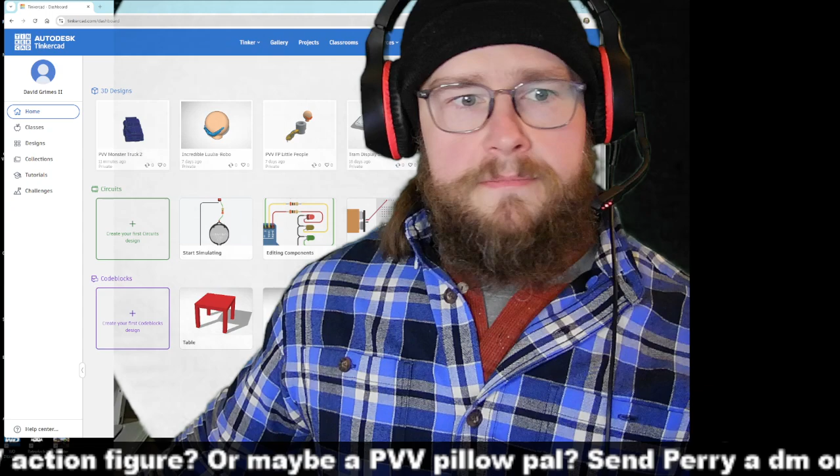I have some 3D work to do, and I thought I would hop on here and do it live because I'm gonna want footage of it for later on when I'm making a YouTube video about how I did this. A number of the fans that I've come across, and a number of people who tune into these live streams often, have gifted me a lot of cool toys, and specifically, I've gotten a bunch of these guys.

These are Monster Jam minis. They're pretty small. I think I have a regular size. Yeah, here we go. When compared with a regular size Monster Jam vehicle, covered with cat hair, considerably smaller. Interestingly, they are basically the same size as the old.

Hey, robotic! They are basically the same size as the old Micro Machines from back in the 90s. The Micro Machines Tuff Trax. This is a Buffalo Tremor 2. I actually used this truck the other day on BeamNG playing the retro trucks.

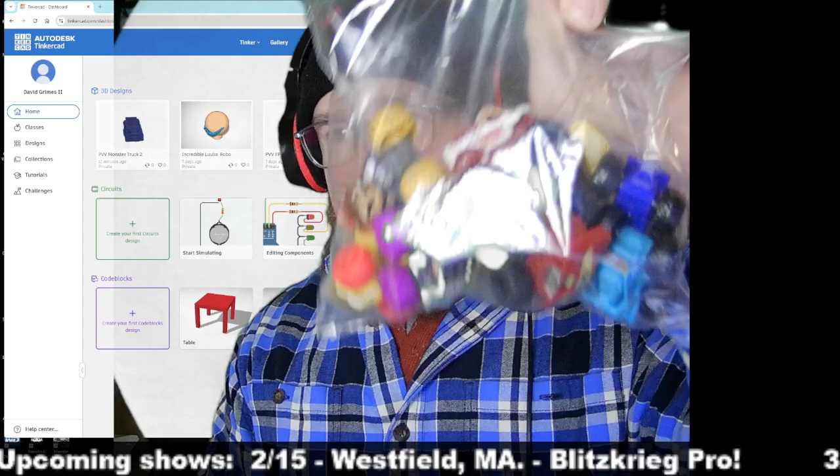But I've been meaning to get on here and design a little display for the pile of these that I've accrued from various fans. And I was sort of doodling up a little sketch of what I'm planning and came up with some cool ideas on how I could make this pretty unique. So I'm in TinkerCAD here, and I'm gonna create a new 3D design, and we are gonna get rolling on this.

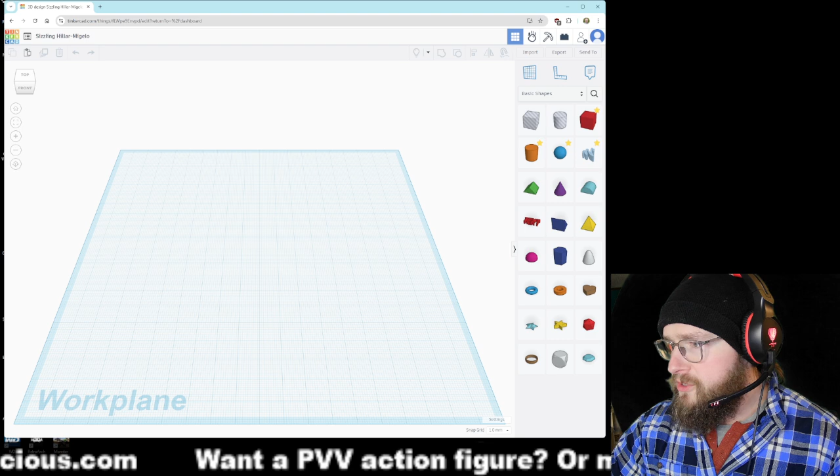This was all sort of a very sudden idea to go live and do this. So I've got a lot of things that are not in the right place. So you're going to see me occasionally shuffling stuff at random here. I've got to stretch my keyboard over where I can reach it. I got to bring my mouse where I can reach it. All things I should have thought about before I got started here, but again, very spur of the moment. All right, I think we're good to go. I do have an abundance of toys all over my desk right now as I've been doing a lot of design work, and I need certain pieces for reference and certain pieces to show on camera.

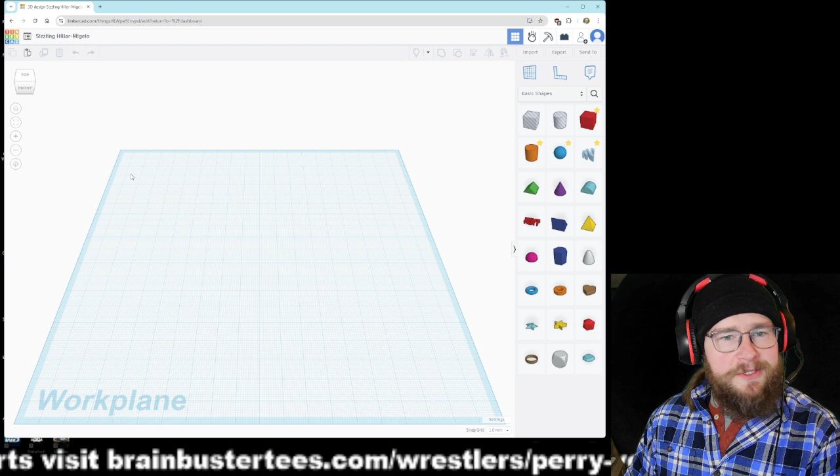So in designing the shelf for these, I have a pretty simple idea, and it's essentially a box with dividers that are going to slide in. And usually I would just do this all as one piece. Sure thing here, Robotic. Usually I would do all these as one piece, but I have some cool ideas on how to kind of customize this for these toys and make it a little bit cooler. So I'm going to start off simple enough.

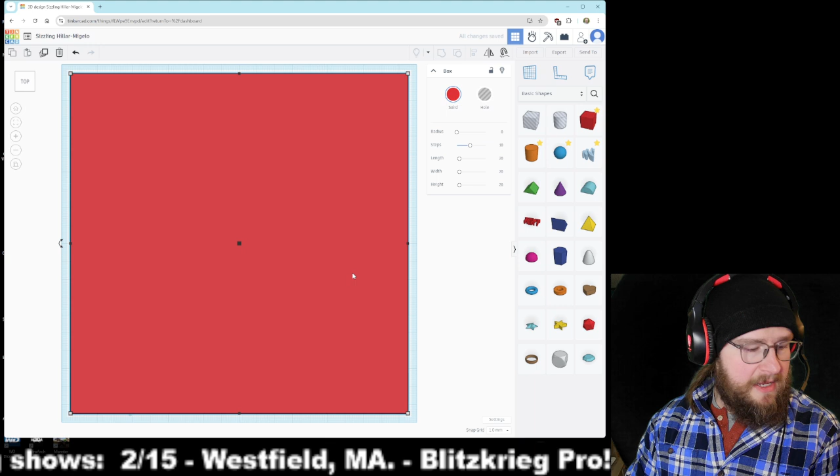I'm going to go ahead and bring a cube into the field here. I'm going to switch to the boring view. Come up on the top, and I have a bunch of numbers here that I wrote out earlier. So I have some limitations that I'm working with. The first, and it's an important one, is the size of my build area on my 3D printer. I can't go any bigger than it because I want this all to print as one piece. You can see there it fills roughly the entire panel, and it's 190 millimeters by 190 millimeters.

And that's sort of the frame of what we're looking at. So I know that I need this entire thing to be 51 millimeters deep going back to the wall. So I'm going to go ahead and, okay. So now I need to make a cube that's going to go inside that and hollow this whole thing out. So I'm going to bring another cube out here. And I know that I want the sidewalls on this to be 5 millimeters. That's a nice thick size that the printer can print reliably. It's a little bit chunky, but good for what we're doing here.

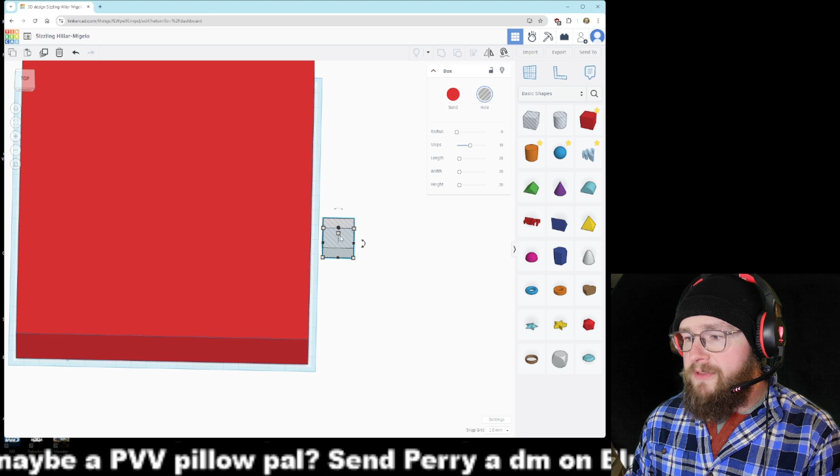So we're subtracting 5 off each side and 5 off the top. So that's 10 off one side, 10 off the other. Makes it 180 by 180. So I'm going to go ahead and make it 180 by 180.

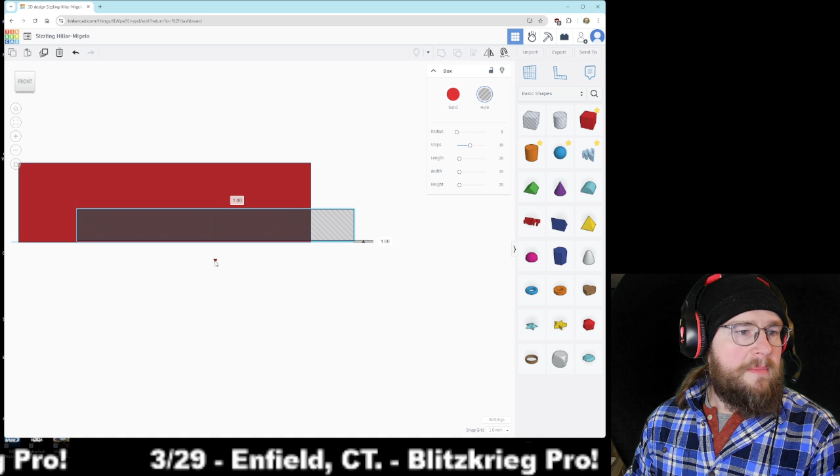And I want that back wall to also be 5 millimeters. So go ahead and raise this up till it tells me I've gone up 5 millimeters.

Go to our top view here. We're just going to center this as best we can. I think the best way to do it is to line it up on one corner. And right now it's moving at 1 millimeter increments. I'm going to go 1, 2, 3, 4, 5. And that is now centered.

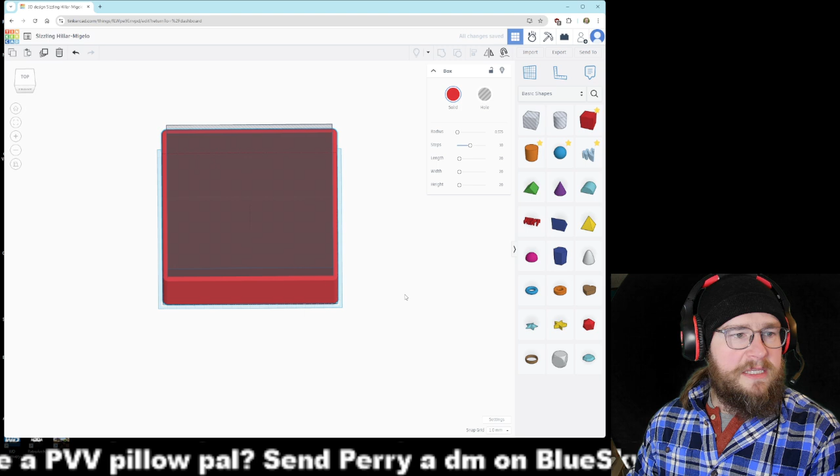And I need it to be tall enough to come all the way up out the top so that it is now hollow. We're going to round the edges on this just a little bit. I don't like the sharp corners right on the edges. So just ever so slight - see, that's way too much. That's about what I want. Something just really minor like that, because I want everything to still be thick and flat.

And that's looking pretty good. All right, so I'm going to go ahead and group that. So now we have sort of the basic box of what's going to become our shelf here.

And this is where things are going to start to get a little bit interesting, because I need to put in some slots and some other various shapes so that shelves can go in here. It's going to get particularly fun when we get to designing the actual shelves.

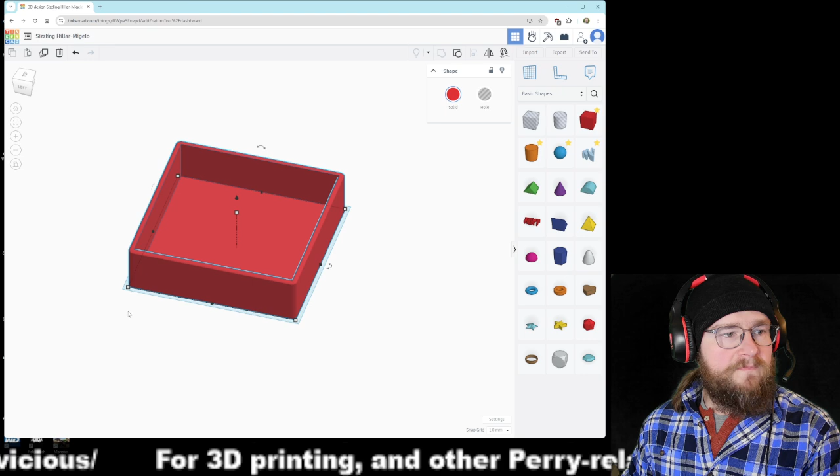So the first thing I want to do, I want a little slot along one side. We're going to call this the top and this the bottom. And I need a little slot running back here because I want to be able to slide in a background.

I want to be able to print a little background so it's not just a plain black shelf. I'm going to print this in black filament. I don't want it to just be a plain black background. I want to be able to print something cool like fake crowds or fake arena or something for each shelf.

So to do that, remember this was 180 from top to bottom. So I'm going to go ahead and bring in another cube. And we're once again going to go 180 - I needed it to be the other way, but that's fine. I'm going to pop this over 90 degrees.

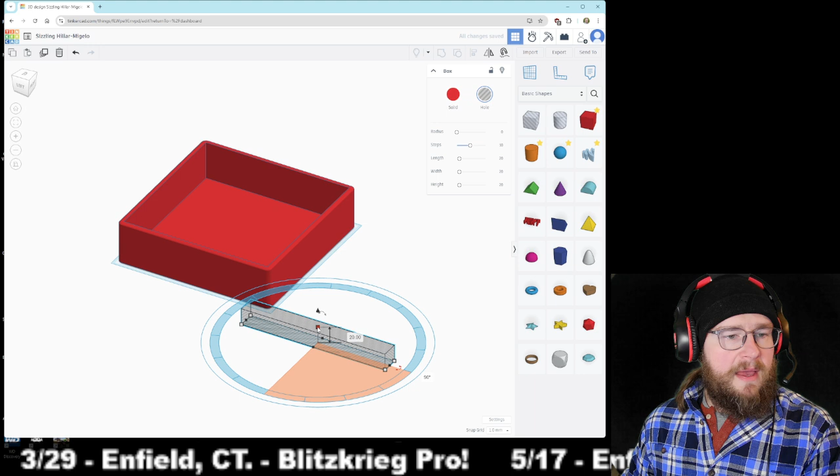And then as far as the height, this height doesn't have to be that tall because I'm planning to print the little backdrop I'm going to slide in on like cardboard or something, so it's not going to be too thick. Because I'm going to use like a cardstock, I think maybe 3 millimeters is plenty. So we're going to call this 3.

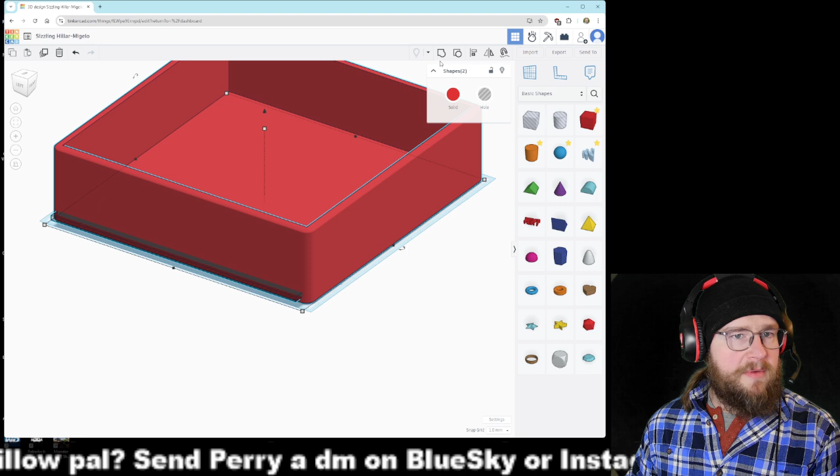Now we're going to go to that top view again. Bring this over, I'm going to line it up with those. That's looking pretty good. But I still want to leave that back plane, so we're going to bring this up 5 millimeters. Okay, that's what I want. I'm going to go ahead and group that. And that's our little slot that's going to let us put in what we need to put in there.

Actually, you know what? I'm going to cheat the system a little bit. I'm going to come back here, go to the top, select just that piece. We're going to bring it all the way over to our edge there. And the reason for that's going to become more clear as we go on.

Actually, I think I need it to be even more dead on than that. That's where I need it, right there. And the reason for that is going to become clear later on.

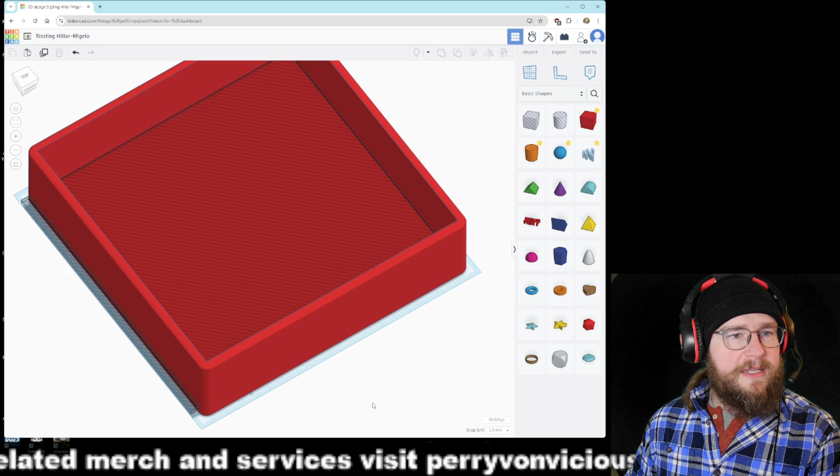Hey, Graves made it. It's a sparse audience tonight because I did this very spur of the moment.

All right, and then is that lined up evenly? Yeah, that's looking good. Okay, cool. All right, so that's where we want those pieces just for now.

So looking at my drawing now, what I need to do, I need to add in some slots that are going to - I feel like this stream was made for me. It may very well be. This may be exactly your kind of jam.

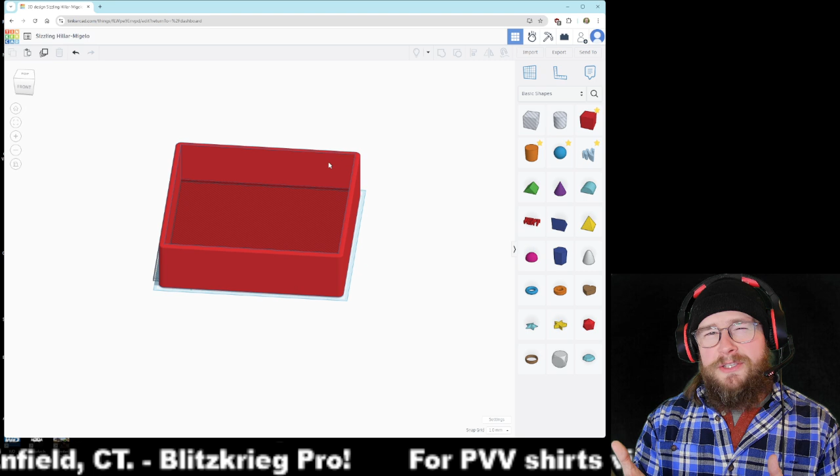So now I actually need a slot along the front edge here and through the top because I'm going to be taking essentially what's plastic packaging - in my case it came for the saw blade for my table saw - but it's a nice stiff perfectly clear plastic that otherwise I would throw in the trash, but I can cut it to make a little window to go on the front of this. So that's how I'm doing my display.

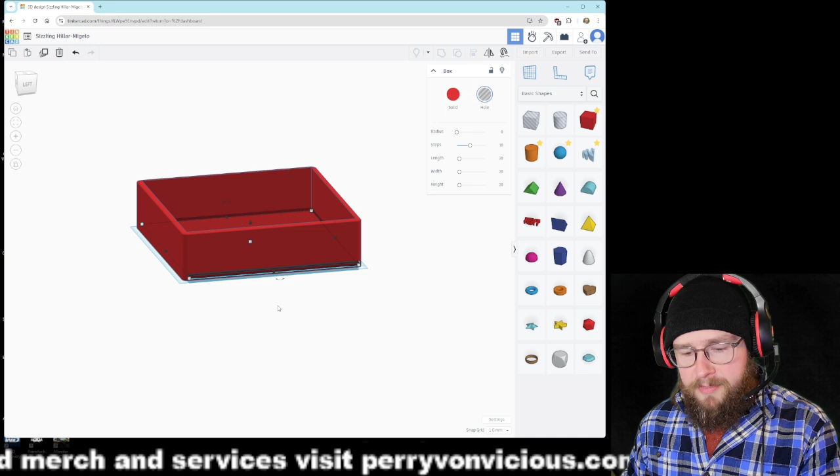And what I'm going to do is I'm going to go ahead and copy this piece because it's already kind of perfect. Hit Control D.

And now I'm going to go ahead and raise it on up just so that I can see what we're working with. I may even make it less thick because right now, I guess 3 millimeters is probably pretty good.

Zoom way in here. We're going to get to about there. And I want it to go back 1, 2, let's call it 3 millimeters down, I think is probably good. All right, and we are going to center it here.

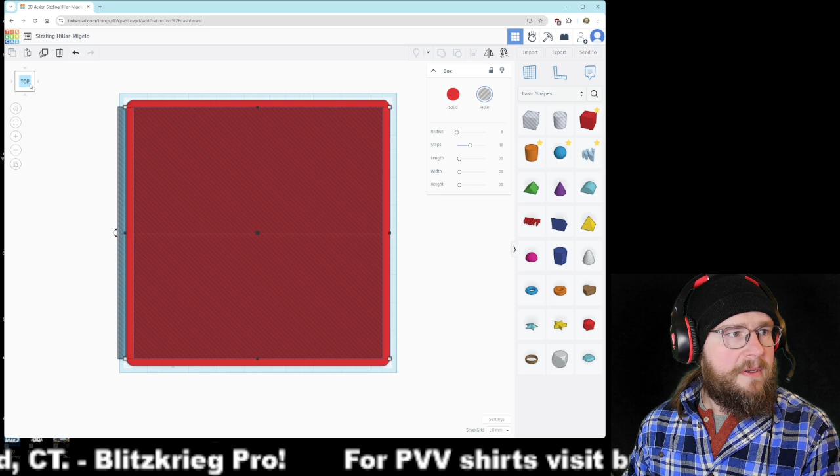Get that top view going. That's what we wanted. All right, and it's going to have to be shorter. So I'm going to change my settings to moving by 0.5 millimeters because I don't need it to go that deep into the side wall here.

So we're going to say about there, and then somewhere like right there. Because right now what I'm making is I'm making a channel that a piece can slide into.

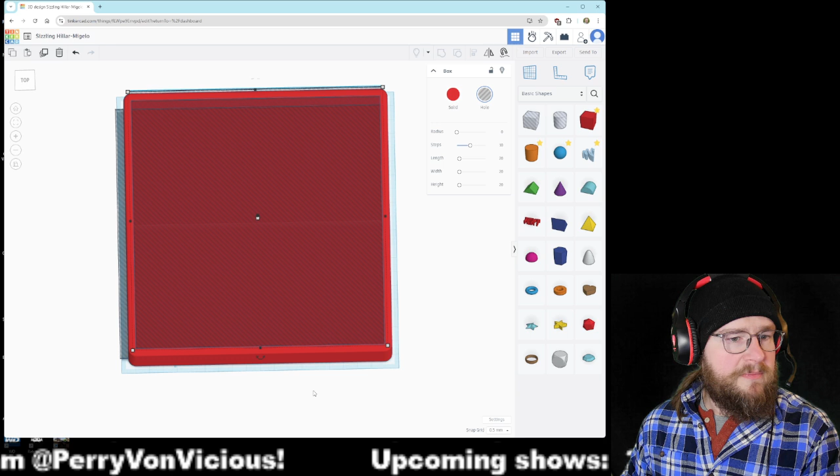Well, let's get a look. How's that? Yeah, we want it to go all the way down. So we're even going to extend the bottom just a little bit here. We just want it to come just into there. Let's get the above view. Yeah, that's looking pretty good.

And I'm going to group that piece. I think that's fine. You know what? Yeah, we'll just group the top piece. So just like that, we've got this channel that I can slide a little window into, and it'll fit inside there all the way around.

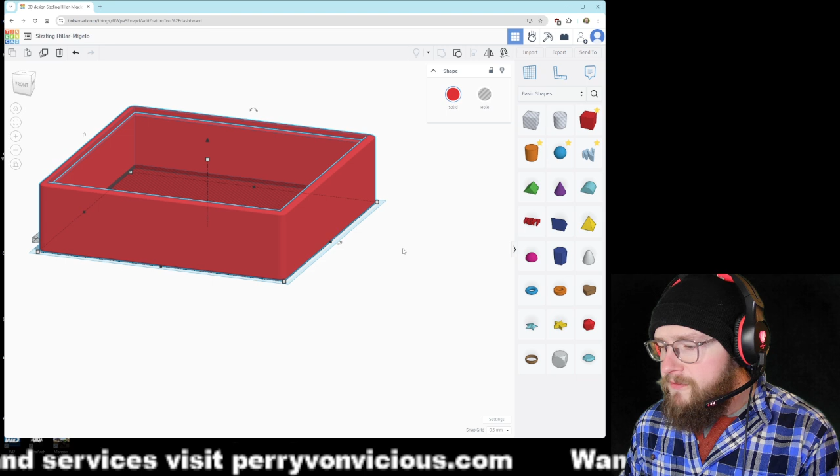All right, there we go, getting vertigo looking at my own design. All right, so now I have this design for these little channels that the shelves are going to sit in, because the shelves are going to be their own pieces.

So for those, what I need is I have a few different shapes I can choose from here. They're all tough calls, I think. Let me make sure I get all my numbers correct here.

All right, yeah, we're going to go with a simple wedge. We're going to turn it 90 degrees. Actually, you know what? We're going to leave it upright. We're going to make a duplicate of it.

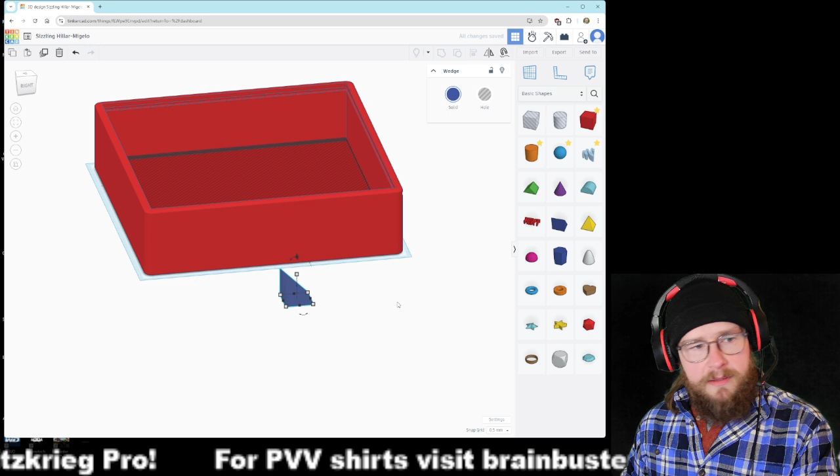Flip it horizontally. I'm going to change my settings to move them by 1 millimeter increments. Oh, that's 0.1, okay, that's what's happening there. So try that again. Command D, we're going to flip it horizontal. Change this to 1 millimeter increments.

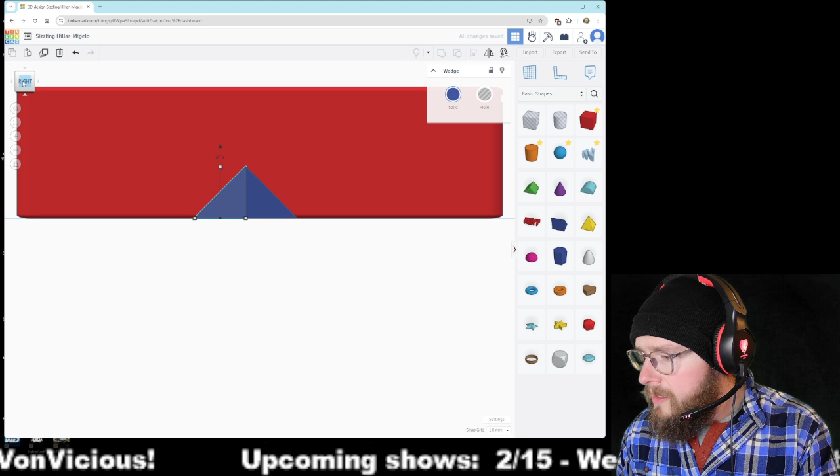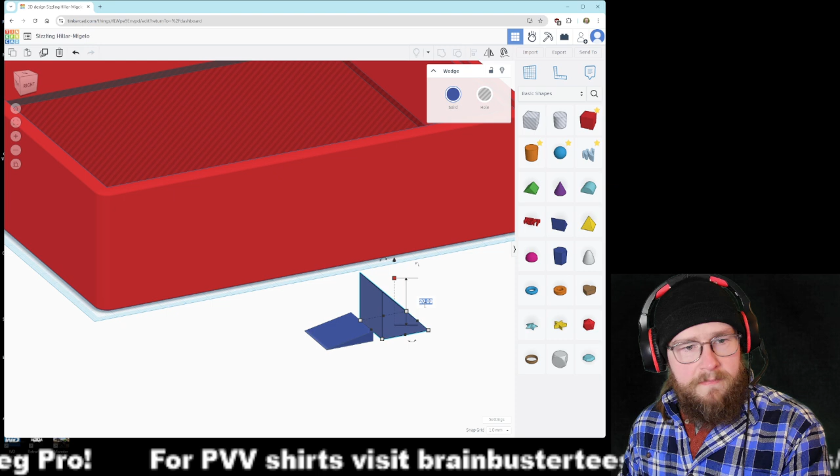And I'll wait till they're even with each other. Call that about even. And then I want these to have a 4 millimeter gap between them. Okay, that's good. And then I want these also to be 4 millimeters tall. Okay, so that's good like that.

And now this part is more or less by feel. Um, what did that end up being? 7.5? Let's call it 7. In fact, you know what? I'm going to make these 5 tall for a very specific nerdy reason that will become clear very soon.

I go with, what did I go with here? Was it 7? Yeah, 7. Good. All right.

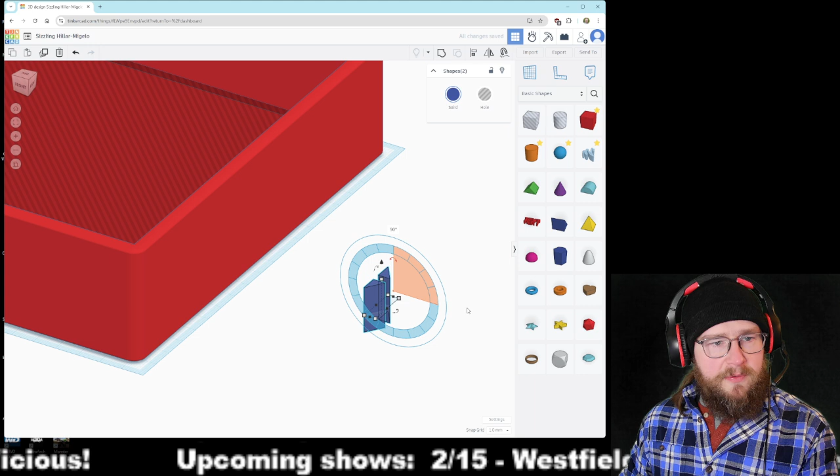So now these I'm going to flip 90 degrees, and they're going to need to go inside our design here, because they're going to be what holds the shelf in place.

So let's get a top view, scoot it over. These are moving by 1 millimeter increments. I just want them to sink down into that wall. Let's see if we can zoom in and see what's happening there. See it right there? We've just sunk into the wall. That's exactly what I want.

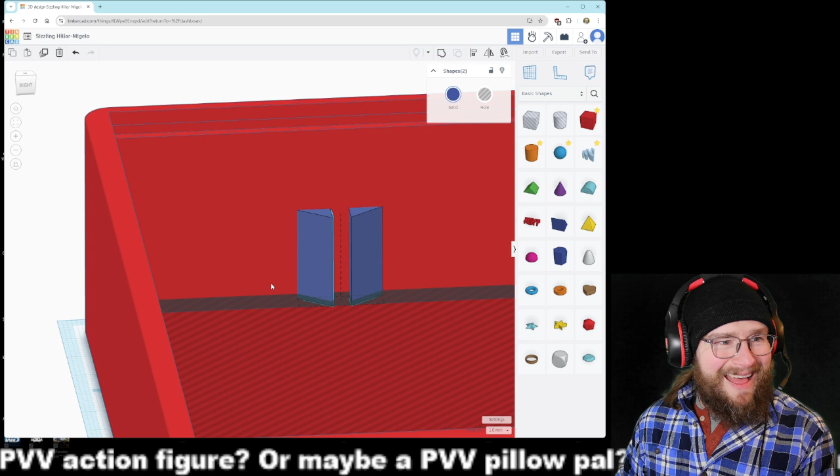All right, and now we have to make sure that this is at the right height, because each shelf needs a specific amount of space. And I have that number here, and it looks like that number is going to be 54 millimeters. So what I'm going to do is I'm going to bring this all the way back till it's at 0. And that should be 54 millimeters.

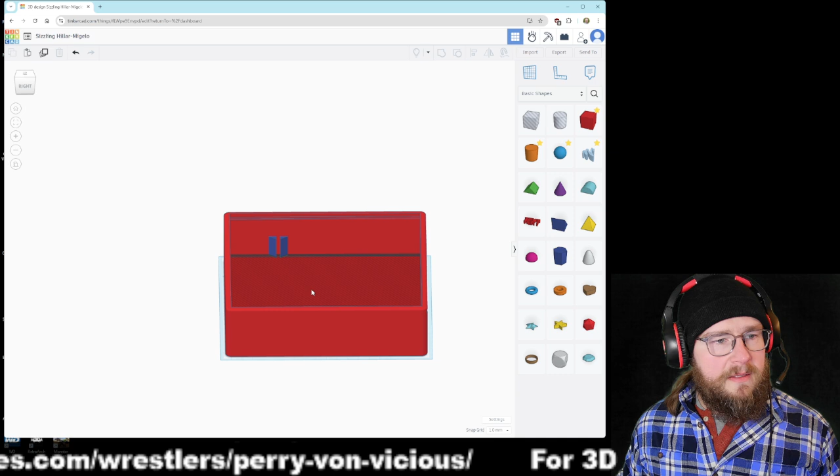Let's get a look. So there's going to be one here, one here. I'm not totally sure that that's even, and it should be. Let's go ahead and, you know what, we're going to end up just eyeballing them because it's not going to matter. They're going to be very close. But just for now, just for the heck of it, let's say that I got it right.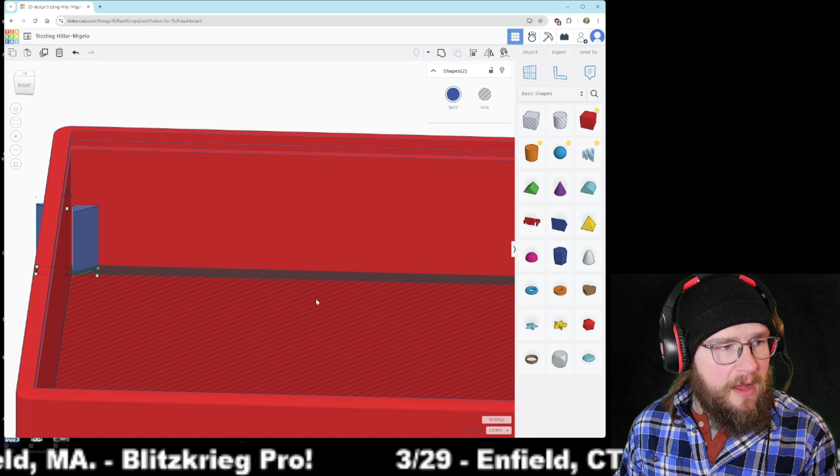Okay, not liking how that's lining up. So we're going to do it over. It is, of course, altogether possible that my numbers are off on my drawing because I was an English major and not a math major.

All right, so by my count, I need 54 millimeters up. Yeah, let's find out. That looks more correct. All right.

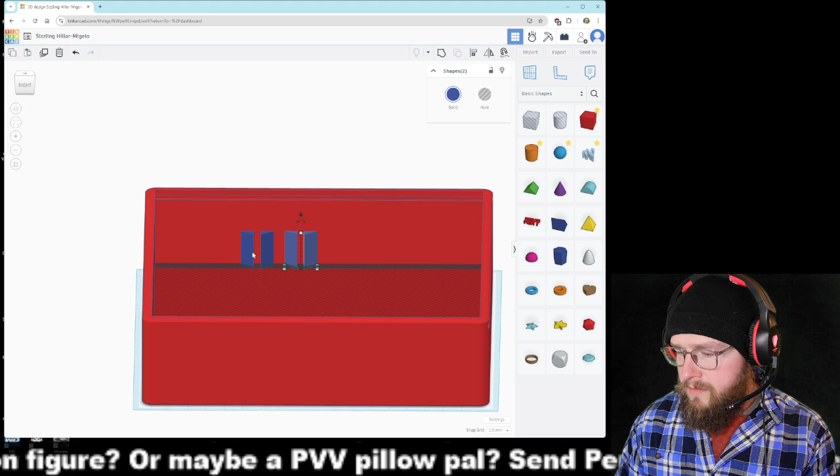So, Control D. We're going to start from there. That looks like we're about even. Okay, that's what we wanted. Perfect. Good. Great.

Now I'm going to go ahead and select all of those. We want these to run all the way up to just under this little channel that we've created. So I'm going to zoom way in and make sure that we don't go over. That looks really good. All right, perfect. That's what we needed there. Okay, looking good.

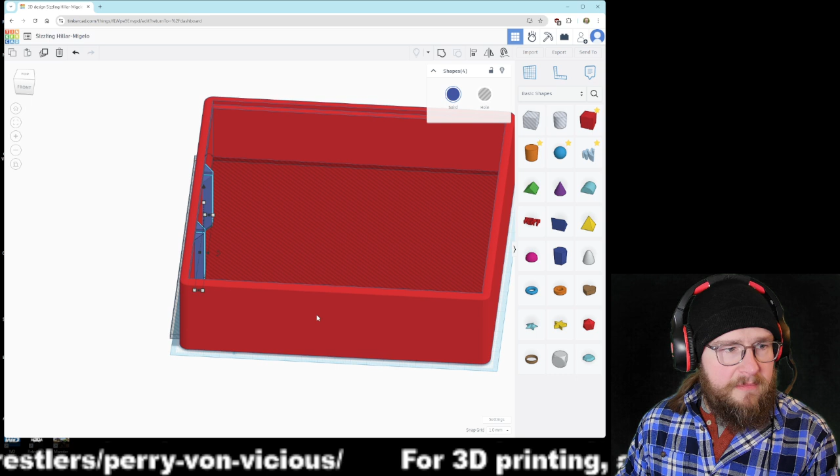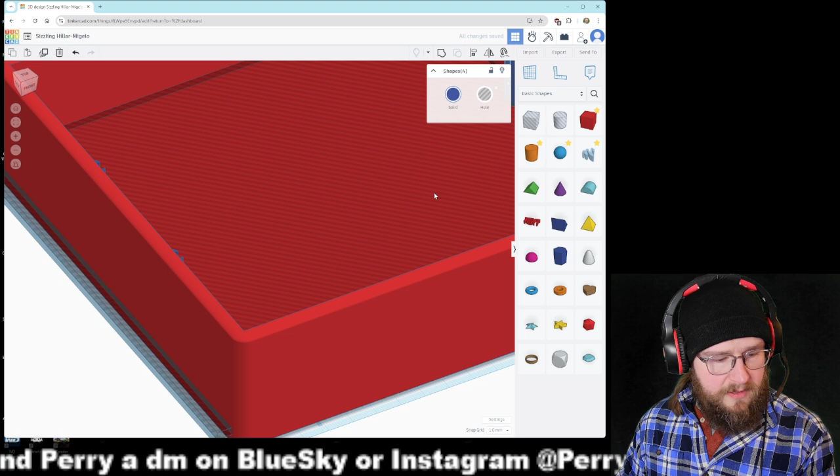So now take all 4 of those, Control D that, we're going to flip horizontal. We're going to bring it directly across right up until it just disappears into that wall. Just right there. All right, and now we have our shelf pieces in there. That's looking good.

All right, and now we can group with this little under part here, and you'll see why I left it there. So select everything, group, and now...

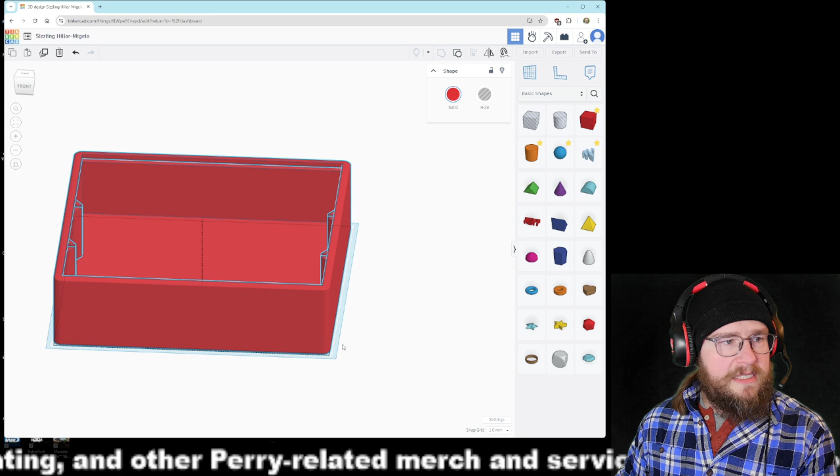These stop just shy of where that little background piece is going to go in. We've got a channel down here where I can slide in a backdrop. We've got the channel at the top where I can slide in our little window pane. So that is the background for this shelf.

Now I need to make the two little shelves that go in there, but I'm also not done with this piece because there's one more little bit of customization I want to do with it that could end up being a little tricky, but I'm happy to make it tricky. I'm happy to make things complicated.

So for right now, hit top, take this. I'm just going to slide that out of our way because now we're going to work on these shelves. So we're going to drop in our cube, trusty cube, and I have some dimensions here.

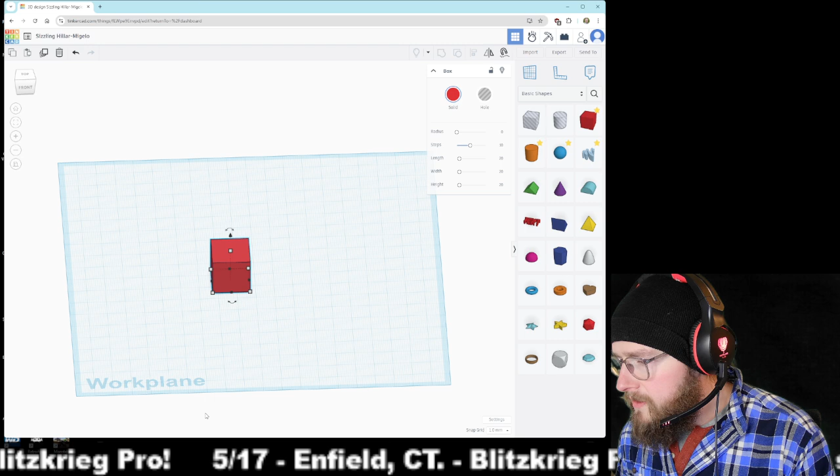It's going to be 3 millimeters thick by 178 millimeters wide by 41 millimeters deep.

Okay, now before I go on with anything else with that, I want to make sure that that's actually going to fit, and I can do it right here on the model. So I'm going to go ahead and turn that 90 degrees, bring it up. We're going to move it on over, and now we're going to zoom way in and make sure that it's going to fit.

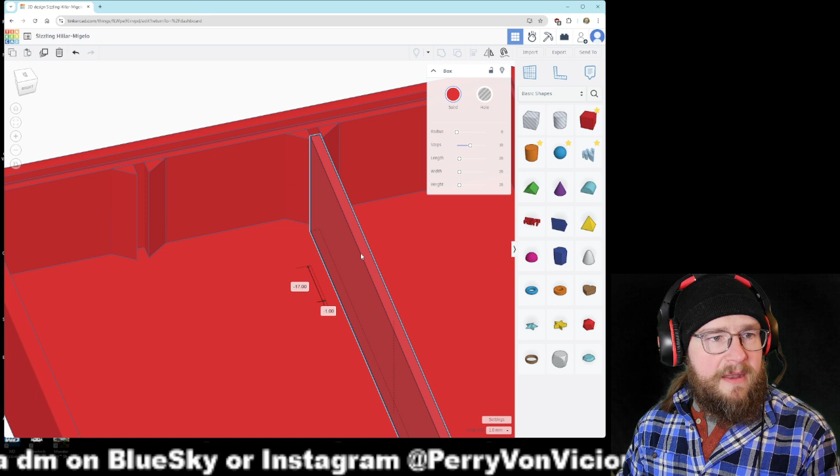Because there's a few different little tricky parts here I don't want to get wrong. Okay, so that's still not through that plastic. And it should be shy on the front here, but let's see. Oh, interesting. Okay, that's where it dips in.

So it'll be up here because of the cardboard. We might need to make it actually a little bit thinner now that all is here to be seen. Let's get a closer look.

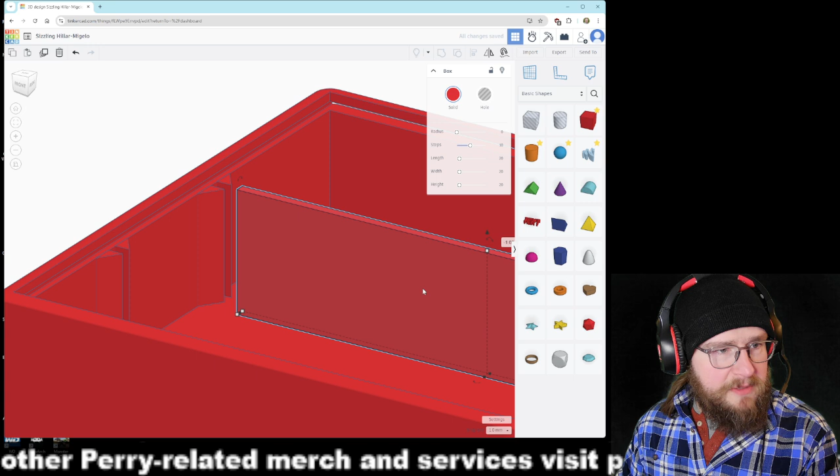Okay, so that's basically touching the back. Yeah, we're actually going to make this a little bit shorter, which is fine. I'd rather it be a little too short than a little too long, because this is probably going to sit about there.

And now if we bring it all the way over and put it into the joint where it's supposed to go, we should see, go to a top view here, that it should have a little bit of leeway on both sides. If it doesn't, I can adjust for that. It should just squeeze in. It's going to be a tight fit, and that's okay with me.

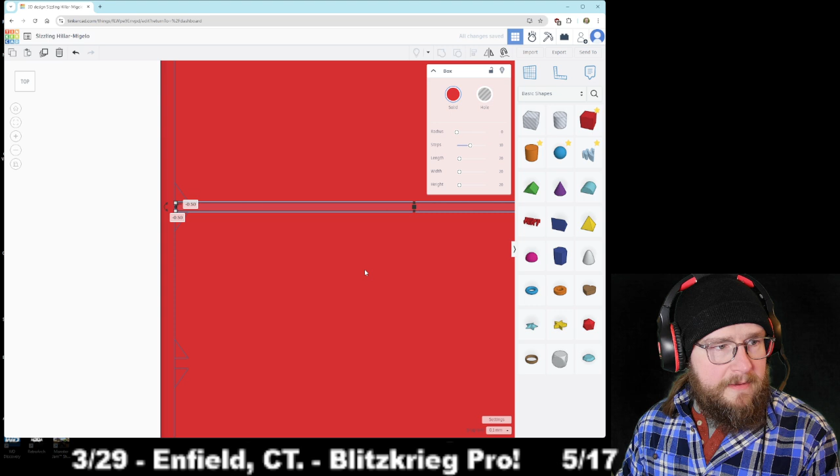Is it that okay with me? That's the question. You know what? I'm going to make it a little bit smaller. Just going to make it about 2.5 instead of 3. I don't like the 1 millimeter gap. I don't think it's enough.

Okay. And then, oh, you know what? I need to check the width on it too. Okay, so that's going to fit nicely in there. We can see that now. All right, and it looks like it's good on both ends as well.

There's a gap here, there's a gap here. All right, so that's good for the shelf design.

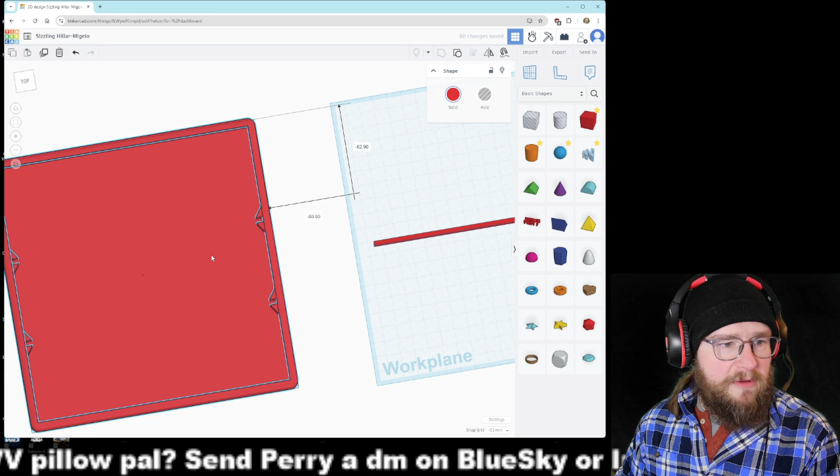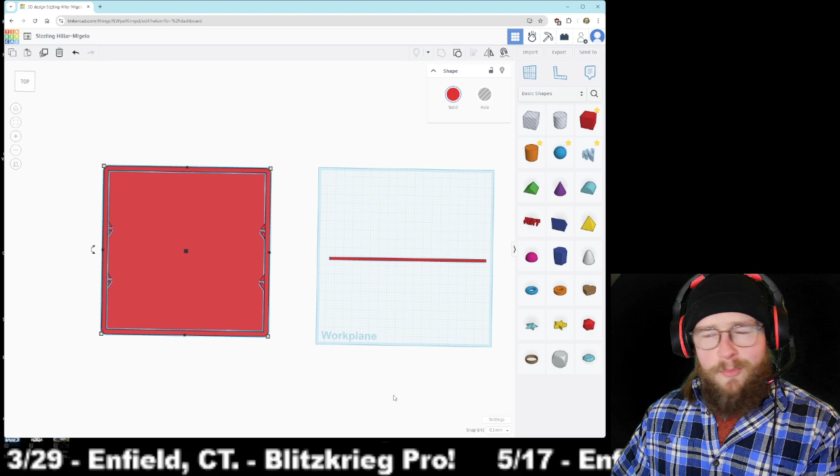Now, when I was initially designing this, I had this idea that I was going to make these shelves sort of like a crosshatch design so that light could get through. That was my kind of interesting take on what I would do this time. Instead, what I think I'm going to do is go a little bit more monster truck specific. And this is where this whole idea gets a little bit nerdier, and I'm pretty excited about it.

So I'm going to, we need to rotate this down here. Then I'm going to go ahead and just lower it on back down. Doesn't really matter where. All right.

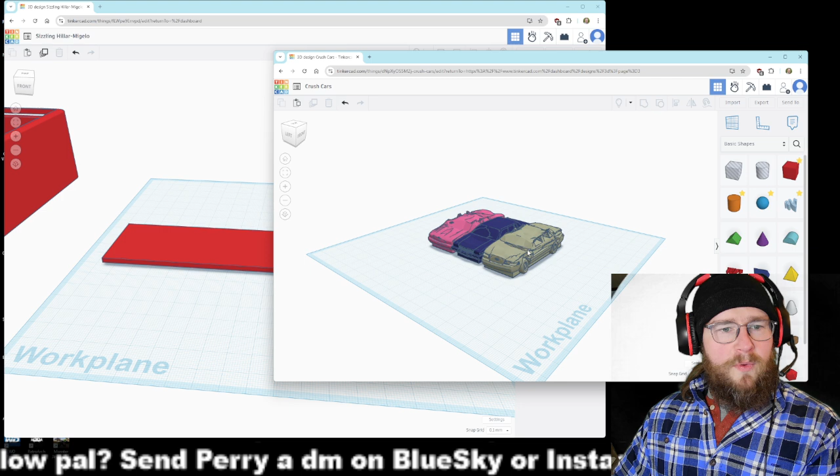Go to the fancy view here. And now, a long time ago for my toy trucks, I had designed, when I was selling them at shows, little crush car sets, just like this. And I want to reuse this. So I'm going to take all three of these, and I believe I can copy from one to the next, but there we go. That's exactly what I wanted to have happen. I hadn't tested it out before I went on stream, so I couldn't recall. It's been a while since I've copied parts between files. All right.

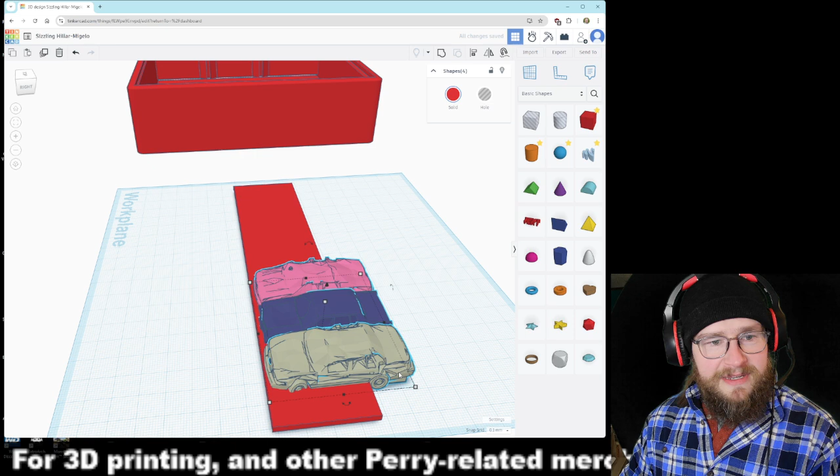So now what I want to do is take these and resize it so that it fits into this shelf, and it's going to be a built-in part of the shelf, so the trucks will always be parked on little crush cars. This was the idea that I was so excited about that I came up with earlier today and said, you know what, I got to stream right now. So we're gonna just bring it all the way in like that, put it in the middle, and then let's get a look.

I don't want these to be like incredibly tall because I want the trucks to have some space, but something like about there is pretty good. So now I'm going to bring it over. We need space for it to slide into its little thing. That looks good to me. And I can select these individually to make copies, but I really don't mind. You know what? We're gonna make them a little bit random, make them all a little bit different from each other. And then we'll make the next shelf also random in its own way.

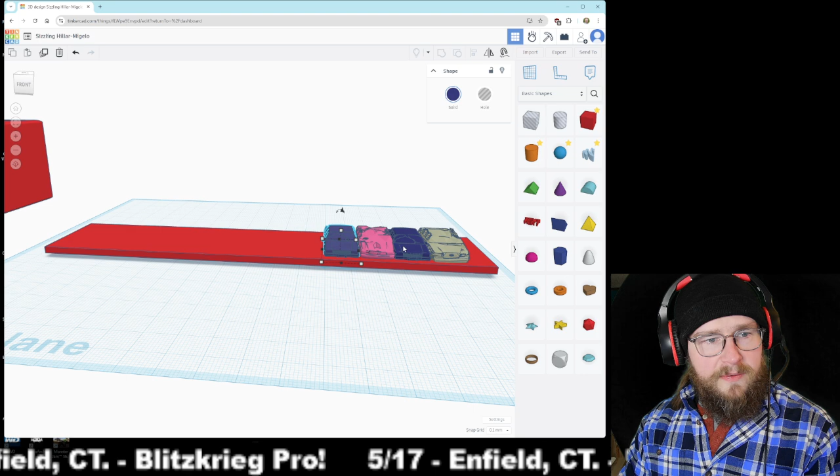So let's come over here. We're going to go just till they're touching. That's good. Make our movements a little bit better. And I'm going to stick with the same one more time there. I kind of like how that looks. Then we'll take this guy from the end, put him next. Then this guy. Ooh, should I leave little gaps in between them so you can see the wheels and stuff? Maybe. Yeah, maybe I'll spread them out a little bit.

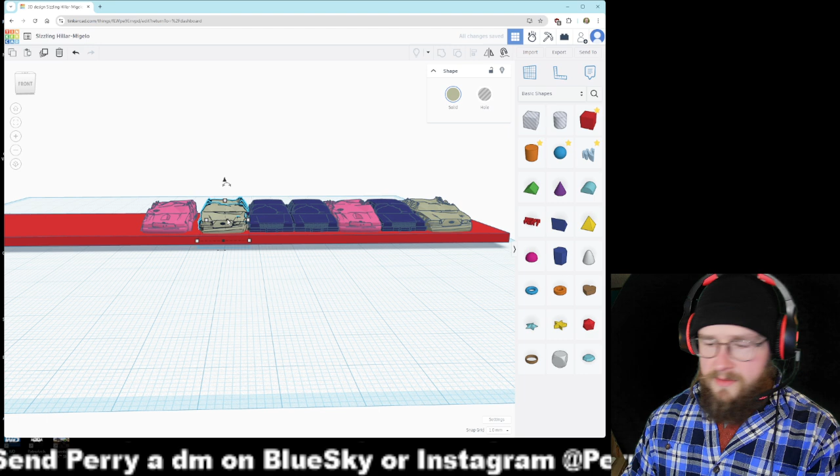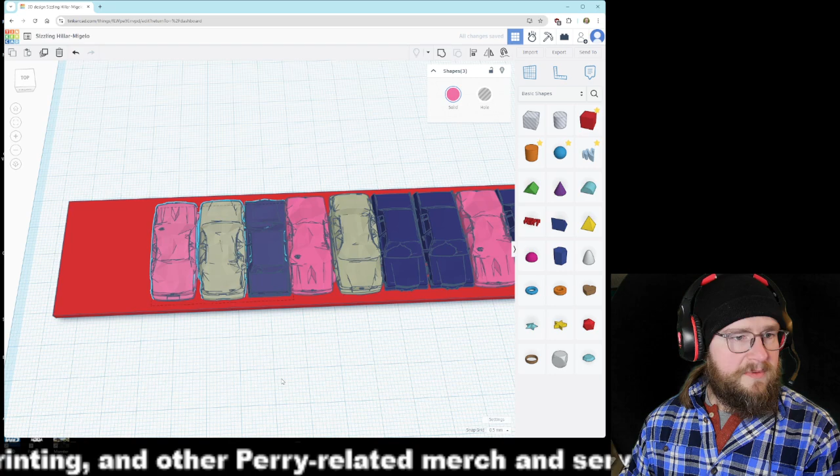Something like this. Yeah, that one can be closer together. There can be a little break there. Like I don't want the gaps to be too big because then you get trucks that kind of get stuck in one spot. There we go. That's pretty good. And now I'm going to go ahead and use a quick little cheat code here. I'm going to copy all three of those, but then flip them around so they're facing the other way. And that's going to be how I get some variation. Just going to make sure they all line up okay. Yeah, we'll put a little gap there. Why not?

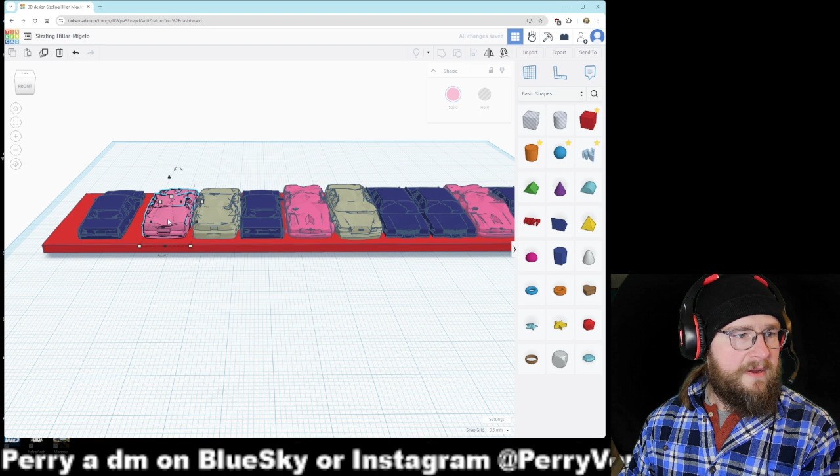Take this one, bring him down. We're going to call that where the last one should be. So yeah, we're going to space these all out here. Something like that. Here. Maybe that one's a little bit closer, so we can have a small gap. This is the part where the design that I'm doing gets to be a little bit more artistic. I get to have a little bit of creative license here. And maybe I'll go back in. Yeah, I think I am. That's exactly what I'm gonna do.

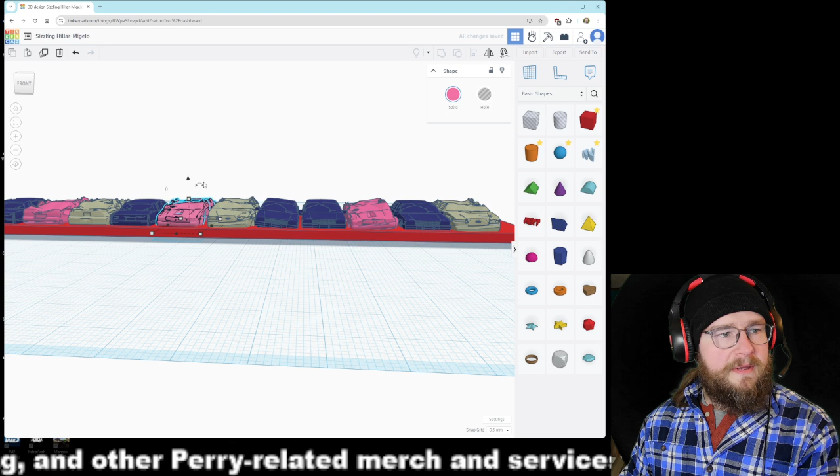I'm gonna come in here and I'm gonna say like, oh, maybe this guy is like a little crooked. He's got a flat tire on one side or something. And this one goes maybe back the other way a little. Maybe this one is also back that way. Maybe this one too. Maybe they both kind of tip that way and then this one goes the other way. Don't want to do it to all of them. You want it to be like irregular. I do think the ones on each end I'm going to tilt in just a little bit so that the trucks on the end don't try to roll over into the side of the shelf. Yeah, like that. All right, and that's going to be how our shelves sit.

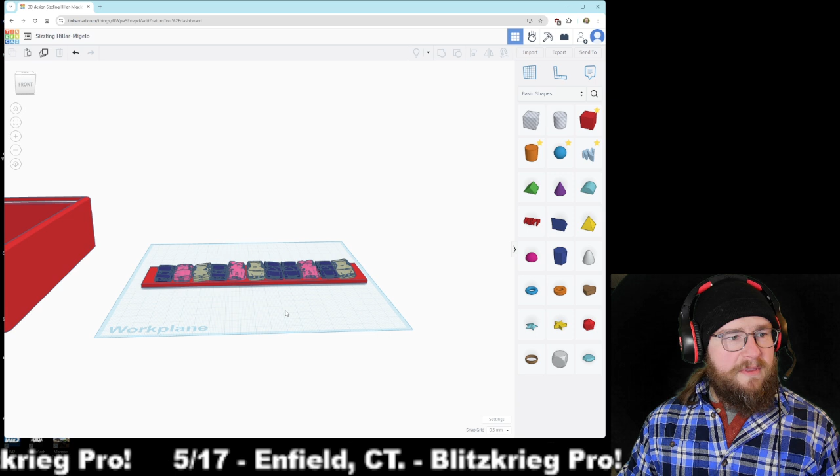Oh, I'm really psyched with how this worked. And you know what I'm going to do to make the next one different is I'm just going to flip the cars around the other way. I think that's going to be the trick here. Yeah. Yep, I think so. So I'm going to Control D. There's our copy.

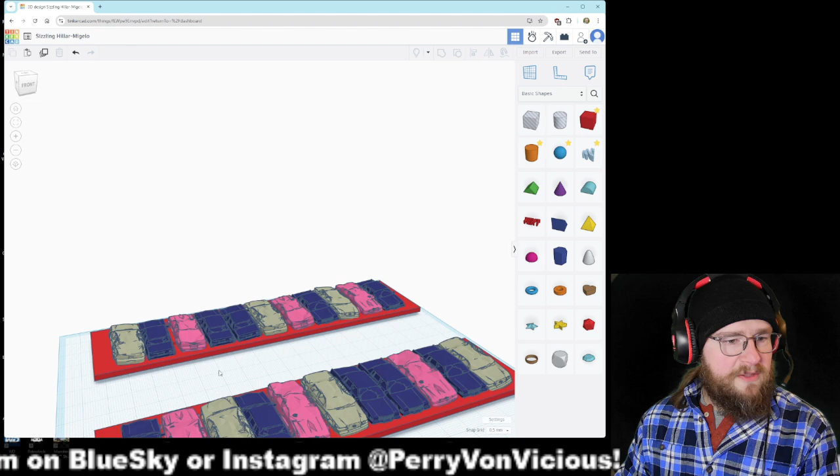Okay, so that's just the cars selected. Now I'm going to flip them that way. Flip them that way maybe. It's going to be hard because I'm not going to know which side's the front or the back, but I'll just make sure that they're set up a little different. I think that's probably good enough. But yeah, I think that's going to look pretty cool.

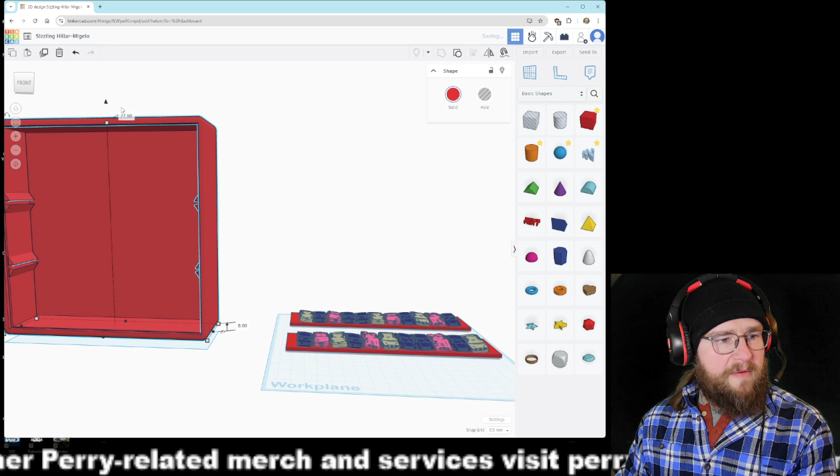All right, so let's go ahead and I'm going to group that shelf. That's going to take a minute. I'm not going to group the second shelf though, and you'll see why in just a second here. For right now, what I'm going to do is I'm going to take this and put it up. All right, let's try that again. Take that, I'm going to put it up 90 degrees. Bring it all up above the build plate. Makes it a little easier on the eyes. Whoa, hey now.

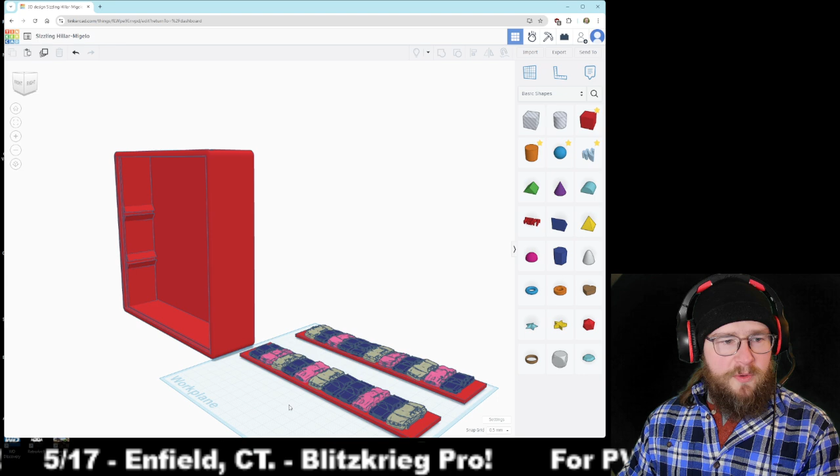Move that out of the way. Yeah, this is gonna be good. I'm excited for how this comes out. Now the next part is going to be painting because while I could just print all of this black, I think I kind of want to paint the cars. That would mean I'm going to have to paint in here though. Or would it? I could just have a little slide-in piece that sits on the... Yeah, that's exactly what I'm going to do. Little piece that sits on the bottom. You guys are watching the brain work in real time here. So, since that's the plan now,

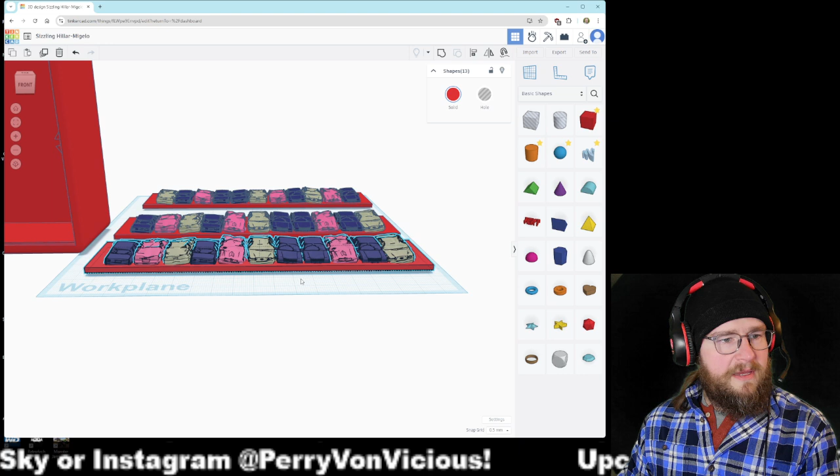go ahead and Control D, slide it down here, go to a front view on our object. I'm going to deselect all the cars, I think. We're going to leave the shelf selected because the shelf I want to come up a little. I want to make it a little bit more shallow. Maybe that's not the way to do it. Instead, I'm going to just pick all of those, shrink the whole thing a little bit. Let's call it, yeah, bring it down to something like that. I think that's good. In fact, I kind of want to do that to all of them.

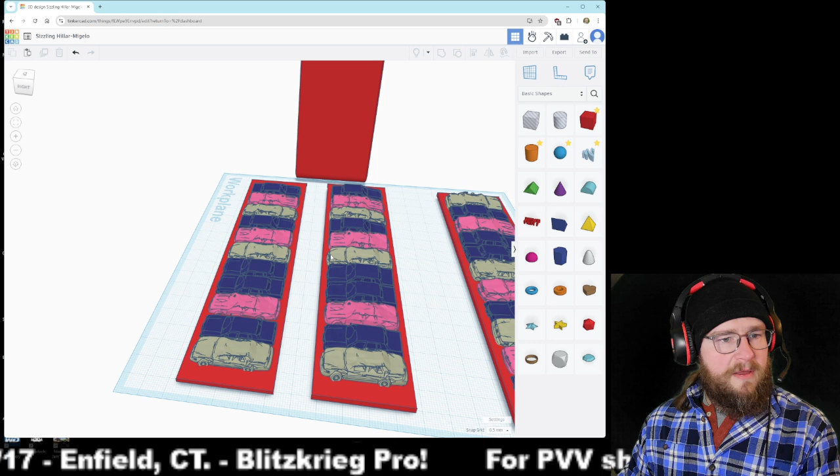Yeah, you know what I'm going to do? I'm going to group these and then alter them. I think that's the way to do it. So select that group, select all of that, and that can group. Select that, and that can group. Those are going to take a second. So while it's chugging along thinking about that, I'm going to lay this shelf back down because we got one more thing to add to it because we need a way to put it on our wall.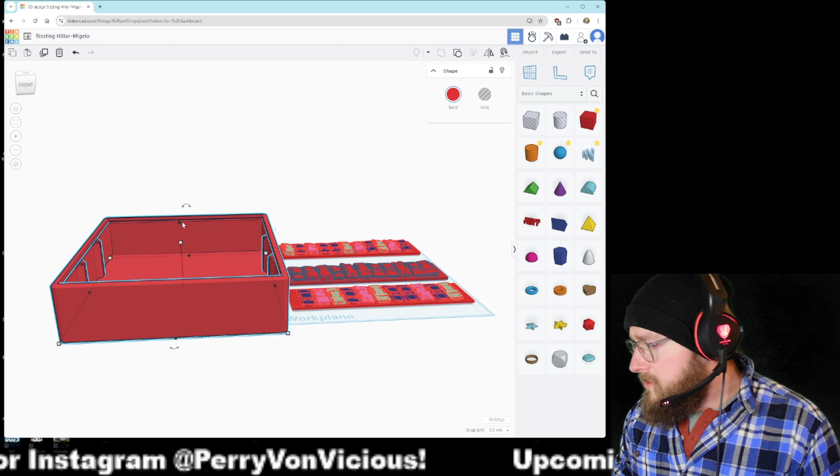And for that, get a little piece to measure here so that I have some numbers to work with. We're going to say 11. All right. We're going to put some mounting holes on the back of this. And what's neat is when I mount this with screws, they'll disappear because I'm putting in a little backdrop behind the shelves. So let's go ahead and drop in the hole cylinder here. We're going to make it 11 by 11.

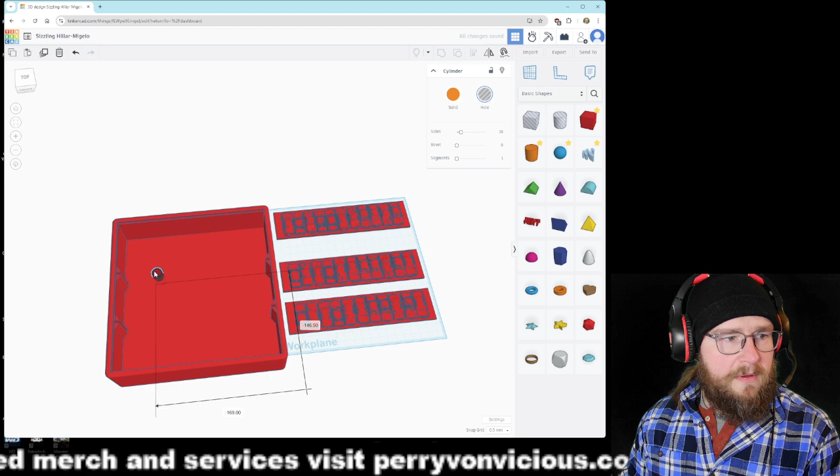Let's get a top view and okay, let's focus on that guy. Get this view going on. All right, and we want it in the top part here, something like here. Lower a little, make sure it's fully through. Then I'm going to copy that, bring it over to right about there. It doesn't have to be exactly even because as long as they're level with each other, that's all that really matters. All right, that's good.

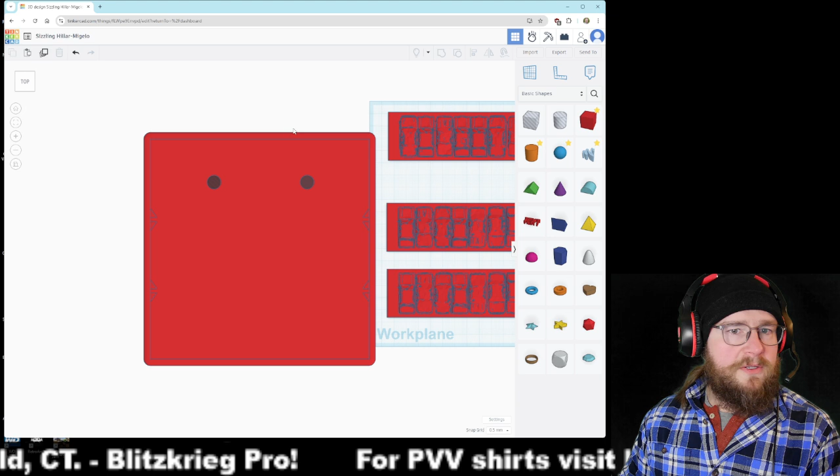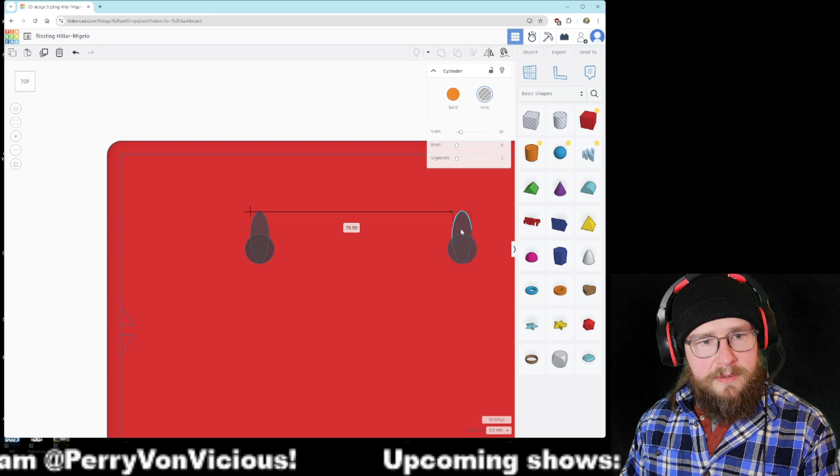Then there's a few different ways I can do this next part, but I think I'm going to do it with an oval. So I'm just going to make a copy of that, zoom in on it. I go ahead and make it more narrow, make it more tall. And then I'm just going to center it to about there. That's good. I'm going to make a copy of that, bring it over and drop it in the other one. And so now that gives us our mounting holes where we can put in our screws. Yeah, I'm pleased with that. I think that looks good.

And again, you won't even be able to see those because there's going to be a little backdrop that goes in here. All right. I want to let that just sit in there because I'm going to paint those cars when this is all said and done. So for right now, I'm going to go ahead and give this a little bit of color. Something like the colors I want to print them in, because I kind of want to do these in like a white and do this in like a black.

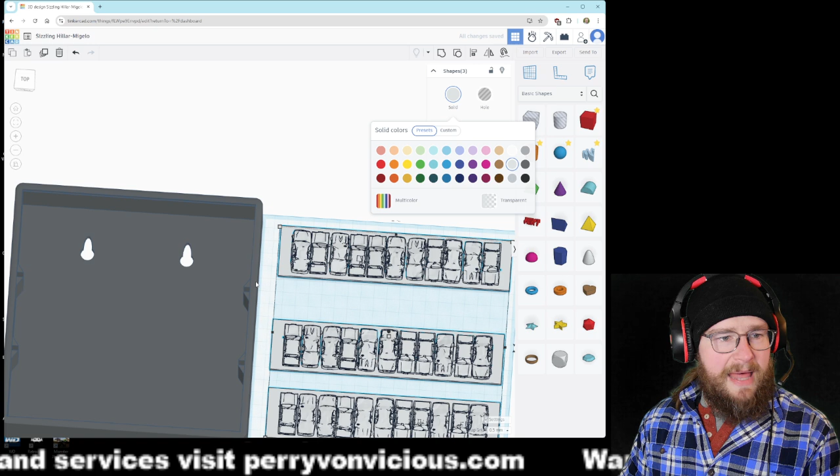So I don't know if this is making sense just yet. I'm going to call this design done for the sake of my YouTube cuts because this is all going to get put together in a bigger video later. But for now, just to give a quick idea of what this is supposed to be, let's go ahead and bring that up till it's at 0.

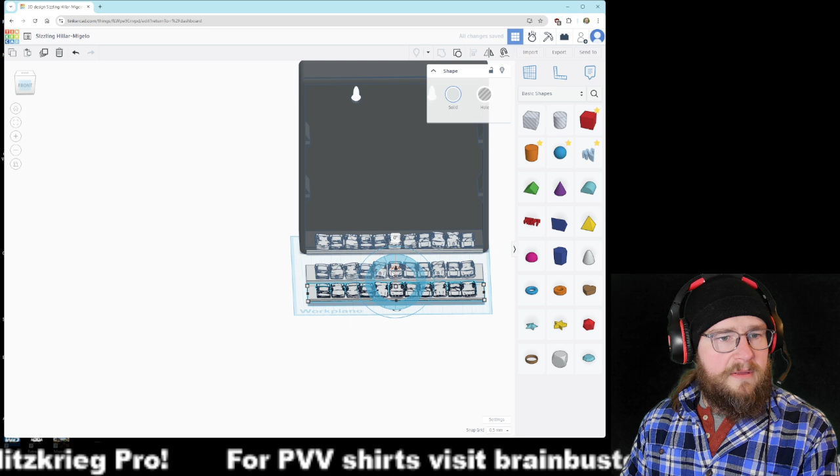Do this, get a front view. This one is going to come up just till it sits there. And then put it back and in there. This one below that. We'll put all the way up where it's supposed to go. This one will go up as well. Let's go to our front view.

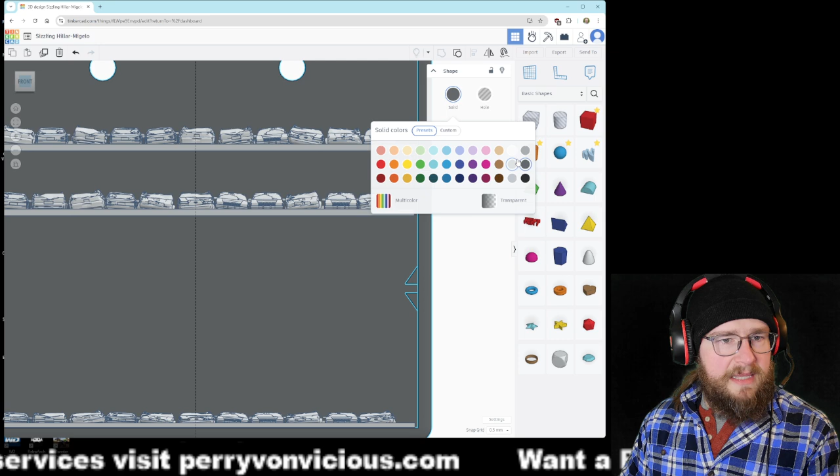I got to zoom way in to get these little things. In fact, I'm going to make this a slightly lighter shade so that I can see a bit better. That's going to sit right about there. And then change my snapping to, let's make sure that's fitting good. Love it. That's going to go about there. Good. Bottom one fills in nicely. I'm going to slide that back and in.

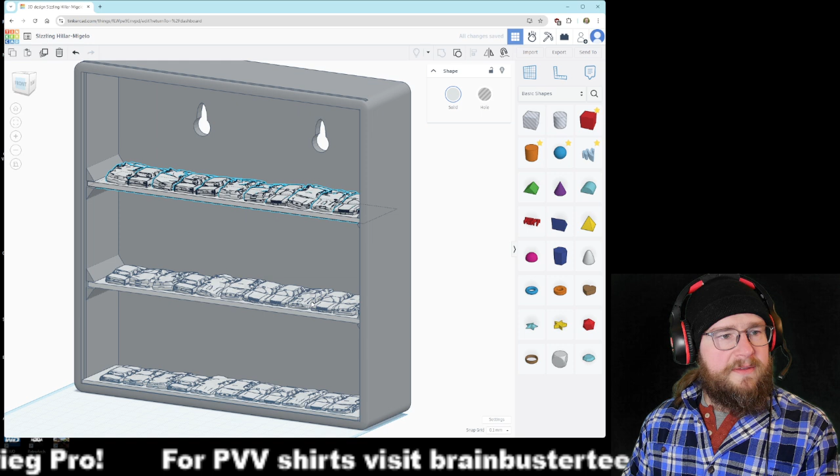And now you can see exactly what I was designing. This was the idea. When this is done, every shelf will have its little row of crush cars that my toys will sit on, crushing their cars. In the back, through this little slot here, let's just make sure this is all going to fit and not block anything. Oh, it's all got to be shorter. Interesting. This is why you do this stuff. I'm going to be able to slide a backdrop in here. Yeah, wow. Okay. Good to know.

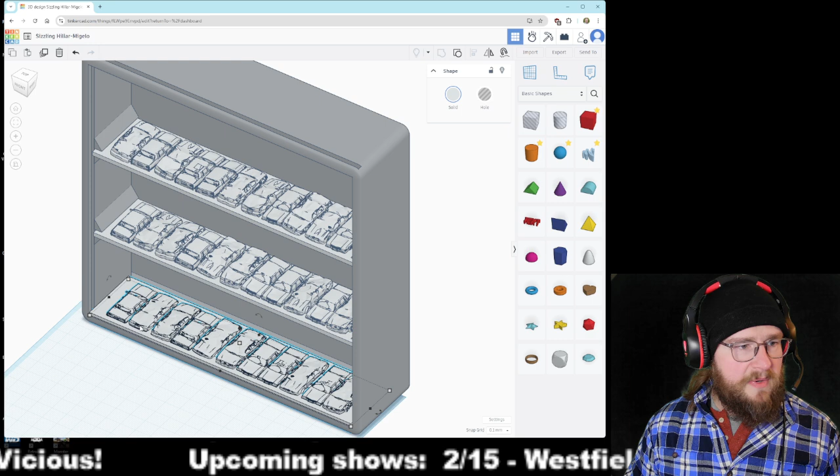We're going to bring these forward just a hair. The bottom one sits underneath that slot, so that shouldn't be a problem, I don't think. Oh no, it doesn't. Wow, wow. Figuring all this out in real time, folks. Okay, now I can select all three of them, and we're going to actually just size them all at the same time. This one can actually be a little bit more. There we go. This one can come just a little. Yeah, now I'm just getting nitpicky.

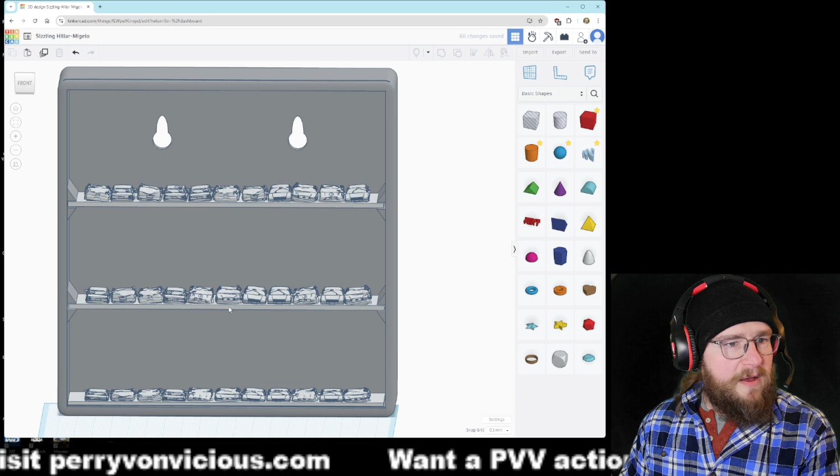And truth be told, these may need refinement when I print because 3D printers are not always exact. But this is the idea. A little display shelf with built-in crush cars for my monster trucks. And if this seems kind of strange, why didn't I just make these one piece with this? The simple answer is for printing, the way 3D printers work, the way the layers build up. If I did this, there would need to be a bunch of supports that I end up having to remove. It would be a little bit messy.

Instead, those cars are going to print flat. The shelf's going to print flat, and I don't think there's going to need to be any supports on anything, which is really ideal with 3D printers. Anyhow, that is for this stream, because that is how these are going to fit, and I'm very, very happy with how these turned out.

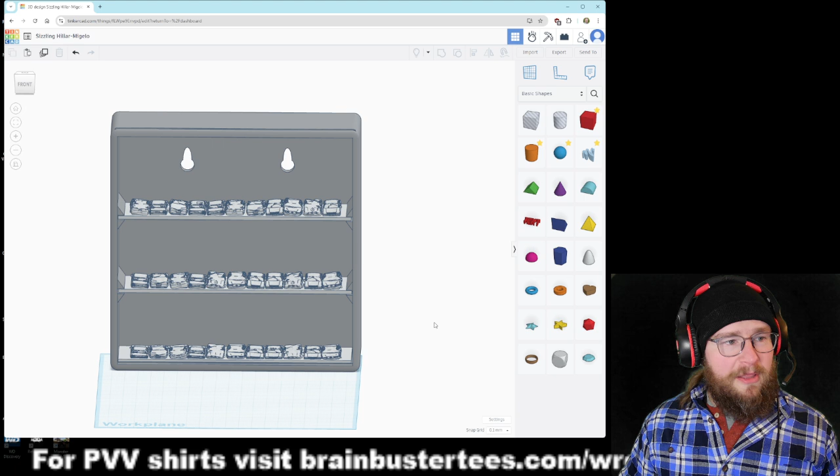This was a short stream, a little bit longer than I actually anticipated it being, but still short nonetheless. And I'm going to be able to start printing parts for this like tonight and possibly tomorrow. And this week during my stream, I may be painting the little crush cars that go in here. I may also throw up another stream when I go to design the backdrop that I want in here. I may just include that in the final YouTube video when it all gets spliced together. But anyhow, thank you folks for hanging out and checking out this live stream. There will be a longer video on the actual build process showing how these print out and everything.